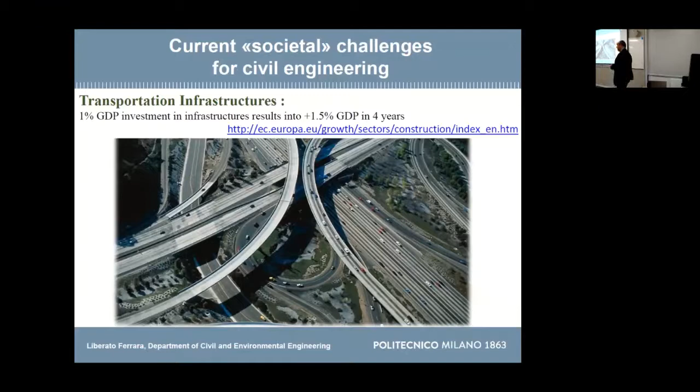And also, our infrastructures worldwide are aging. This is quite natural - we built them 50, 60 years ago. Now they are aging. They are also aging because the volume of traffic, for example, has continuously increased. So we are demanding more and more from our structures.

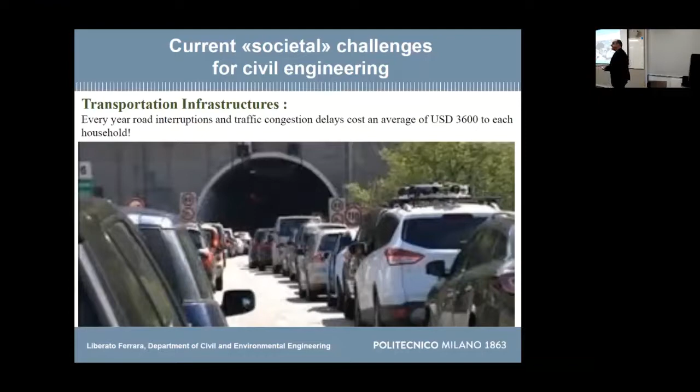And every year, the delays in traffic, the interruptions, cost every household, every family $3,600 - just in money that goes out, and you don't know why.

Coastal protection - we always hear about climate change, which is nowadays a reality. And we have more and more frequent extreme weather events, which actually stress our structures.

Also, we have to take into account that we have to look for coastal defense structures, because just in the European Union, 700,000 people live in areas which are exposed to coastal flood. And we have a huge coastline - 68,000 kilometers. The US has just 1/3 of it.

Green economy, decarbonization - what does it mean? Well, first of all, it means that we have to reduce our dependency on fossil fuels. This is another big problem, because we cannot simply go to the mine shaft, close it, and forget it.

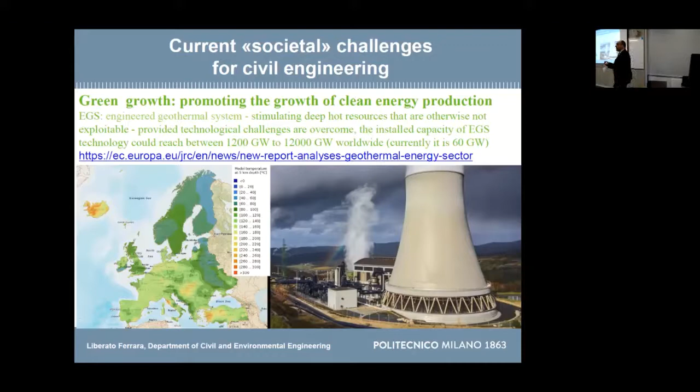There are structures and infrastructure in service of that. You can imagine that the water that you extract from the soil has a huge quantity and different types of aggressive substances in it, and they attack the structure. So this is a problem that civil engineers working with construction materials have to provide a solution to.

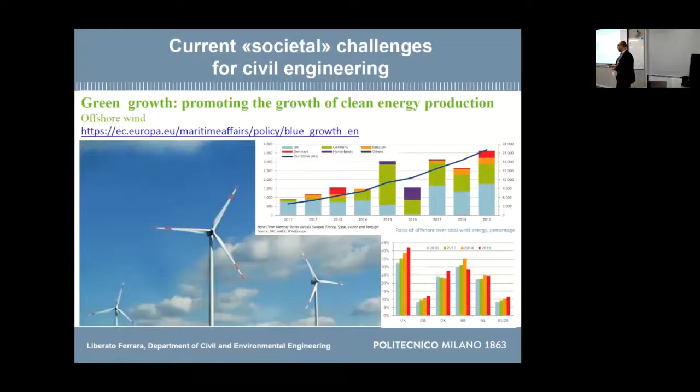We have to provide a solution to make offshore wind energy more competitive. And this is also a huge field in which we can work. And there are also a lot of sectors which are related to what is called blue growth.

Think of it - how do we call our planet? How is it called? Earth. What is it made of? 70% of it is made of water. So it's just like an oddity. But the fact is that only 5% of our economy comes from the sea. For example, 5% of our food, and 95% comes from the earth. So there is a disproportion.

So we have to invest more and more into sectors which can promote a sustainable, respectful use of the sea resources. And some of them may also be interesting for us.

There is a very interesting exhibit inside which stresses that humankind has become a geological force in the sense that we shape the planet. So we have this responsibility, we have to shape it in the right way, not to destroy it. And as engineers working with concrete, we have the responsibility of using appropriately a material which is the second largest material used in the world.

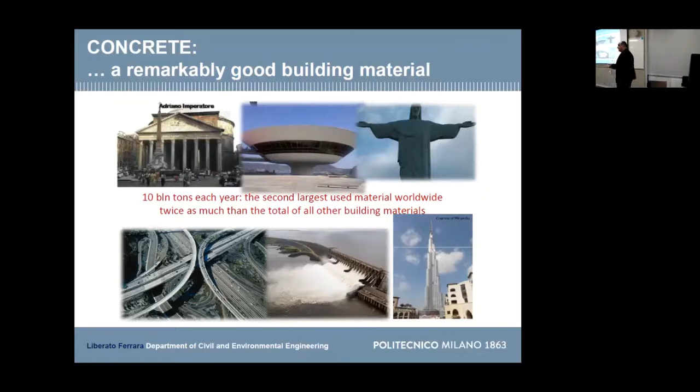Water is first, so concrete is the first man-made material that we use. Every year we produce about 10 billion tons of concrete, meaning each one of us has a dowry of 1.5 tons of concrete per year. And we make structures, infrastructures, iconic buildings like this one.

This is the oldest concrete building still surviving in the world, the Pantheon in Rome, made with a functionally graded concrete. We think this concept is relatively new, but the Romans adopted it: they made concrete with travertine aggregates, very strong and hard in the basement, and reduced the strength of the aggregates as they went up. The dome is built with pumice aggregates.

Pumice is a stone which floats, used just to reduce the weight. You can see how the thickness of the dome also reduces. So there was some ingenious structural design in that.

The other thing is, look here, the dome starts here, whereas the wall goes up to here. If you're familiar with shell structural analysis, this is the point where the hoop forces move from positive tensile into negative compressive. Where the hoop forces are tensile and concrete cannot resist them, the Romans put the confining wall. Where the hoop forces were compressive, which concrete can resist, they left the dome free. This is a concept that, for example, Brunelleschi and Michelangelo had completely lost when they built their domes, which actually suffered cracking exactly in this area.

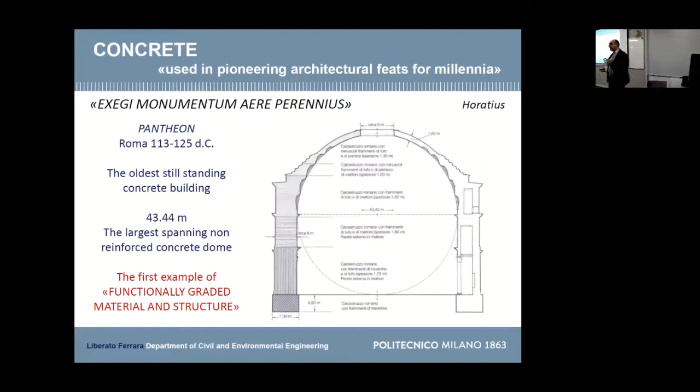So this is just to tell you that as engineers we have to merge material and structural concepts. I like to say that we must learn to think holistically. This is our responsibility, and we also have to think beyond the cubic meter concept.

So why does concrete have such bad publicity, people saying it's not environmentally friendly? I'm quoting our colleague and friend Karen Scrivener from EPFL Lausanne, who said it's simply because we use such a large quantity of concrete. If we had to make the same things with any other material, the carbon footprint would be much more disruptive than what we have. So we have to keep this in mind.

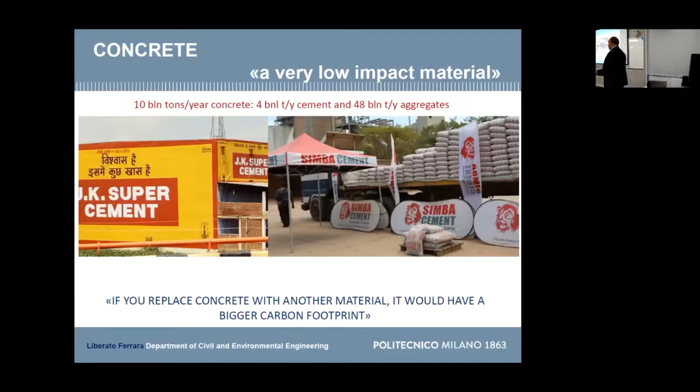And keep in mind that cement is a commodity nowadays. These are pictures - this is India, Niranjana and Priya can confirm. This is Tanzania - you can find it really on the streets, like in an open air market. It's a commodity.

But cement and concrete suffer from a problem: like stones, they do not have good tensile strength, so we need reinforcement. And for several reasons, the marriage between concrete and steel is an excellent marriage. We have to consider that steel is the weak part of it, because steel, when exposed to the environment, is subjected to corrosion.

Concrete protects it, but concrete cracks, and so immediately a highway is open for the aggressive environment to get in. Each year, the cost of repairing corrosion damage sums up to 3.4% of the world's gross domestic product. So you can imagine that part of our work is just to repair these damages.

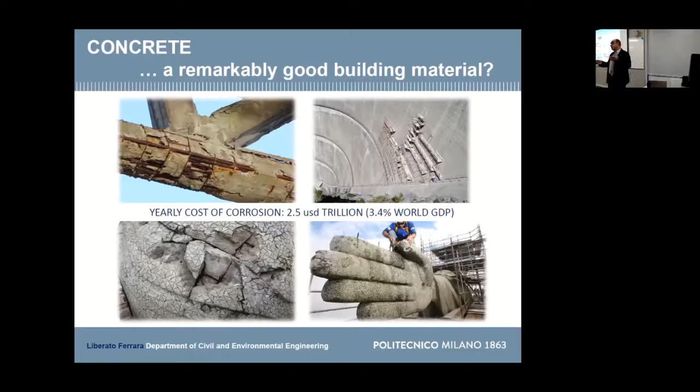Concrete cracks, as we've said. And if you pick up any structural design code throughout the world, wherever you go, you find sentences like this: cracking is normal in reinforced concrete structures. Concrete cracks, you cannot avoid it. And when I teach beam bending to my students, one of the first concepts I try to deliver is that we want concrete to crack.

Because if concrete does not crack, steel works at 20, 30 megapascal, which is less than 10% of its yielding capacity. So what is the matter of putting there a material which works at 10% of its capacity? It's not wise from the engineering point of view.

But you also find a sentence like this in the code: cracking shall be limited to an extent which will not impair the proper functioning of the structure and the durability, causing its appearance to be unacceptable.

This brings me to another concept. When we design generally a concrete structure, our approach is this: we design for ultimate limit state and we check the serviceability. This is perfect, this is okay. Well, if you go for ultra high performance structures, more likely it's not so obvious that once you have designed it for ultimate limit state, serviceability is okay.

But just remember that ultimate limit state is something that we design such that it never happens. Serviceability is something that the structure will experience throughout its life. So we have, in a sense, also from the educational perspective, to bring back importance to what is the service scenario of the structure, because that is what the structure will experience throughout its life. And one of the main parameters that we are called to determine is the crack width.

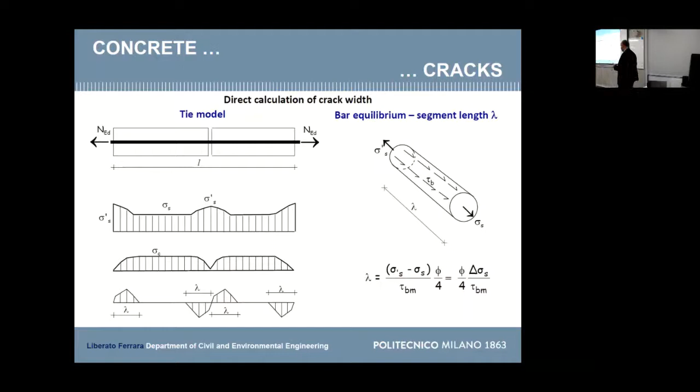And by simple equilibrium consideration, if you go back to any of your structural mechanics, structural design handbooks, you can find this equation. You find here that this transfer length is related to the bar diameter. Okay, keep in mind this concept.

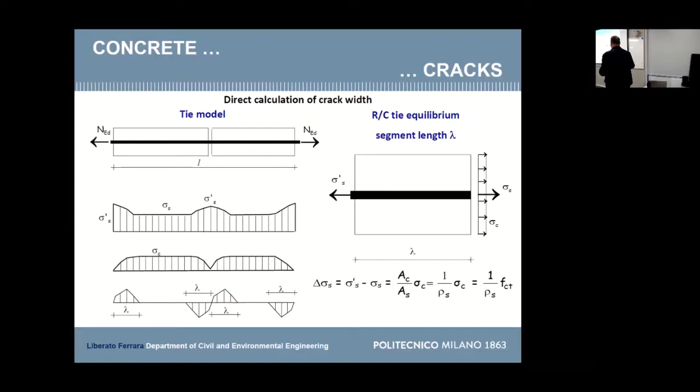Then if you write some other equilibrium and you consider not only the bar, but the whole segment, here is a crack. And here you have the coupled action, concrete plus steel. You find what is the increment of stress, the stress transfer, which must go from steel to concrete and vice versa. So you combine these equations and we find that the transfer length is proportional to the bar diameter and is inversely proportional to the amount of reinforcement.

So the issue is that with reinforcement, you do not avoid cracking. You need pre-stressing to avoid cracking. It's not that you put more reinforcement and you avoid cracking. No, that is a very bad idea to propose.

But given a certain amount of reinforcement that you must put there for other requirements, there is this parameter that you have to take into account, which is the diameter of the bar. The smaller the bar, which means also the higher number of bars that you have to put in there to get the same area, the smaller is this transfer length.

This transfer length, anyway, is also related to the crack width. So we calculate total crack width as the unit crack width, the difference in strain between steel and concrete. You can work out these equations from any handbook, and you multiply by this length parameter.

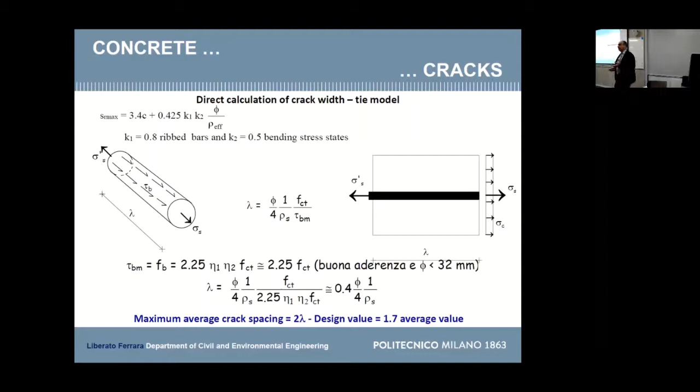So this means that if you have smaller bar diameters, you will have more cracks, but each one of them will be smaller. And this is good from the structural point of view, because the crack width is the parameter which governs the durability, but it also governs the loss of stiffness, which impairs the serviceability, for example, the deflection of the structure.

So this is what we generally do for cracks, which are caused by mechanical actions, can be forces, can be restrained deformations that induce stress. But there are a number of phenomena that can cause concrete to crack that we do not know how to handle, how to calculate the width of crack due to this. And most of these phenomena really occur in very early ages of concrete.

For example, plastic shrinkage is due to some differential evaporation. You have a gradient of water. And just some examples of an experiment we did with a homemade setup that we built. It cost us 50 euros going to buy the pieces in the stores.

So this was the specimen, this was a heater, this was a fan, and we had here a pot with water on a scale just to check the water evaporation rate, which is the parameter set by the standard.

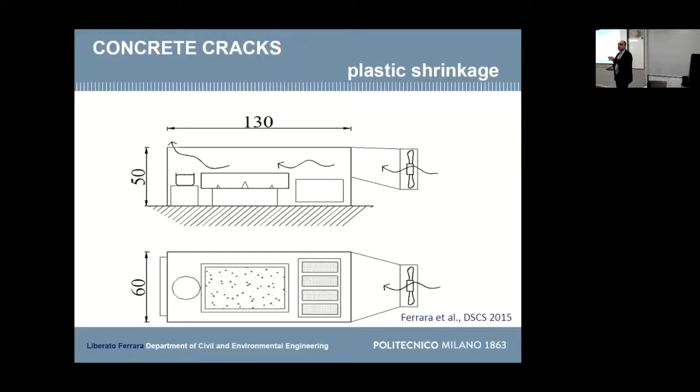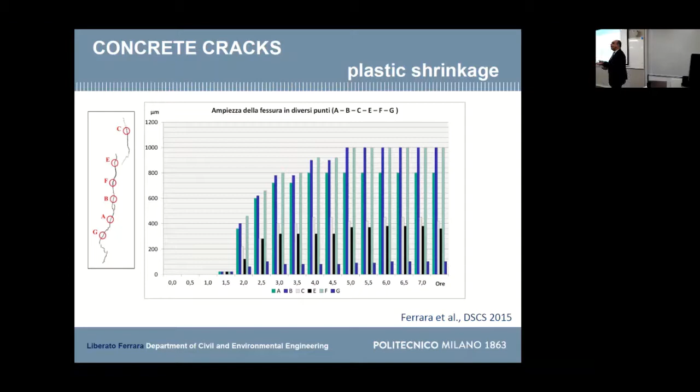This is one of the cases in which self-healing technology may help, because these cracks immediately appear and you can hardly cope with them well, you can check the curing status and so on. But if you have something which helps close them, in this case we used pre-soaked lightweight aggregates, which helped in some kind of self-curing, supplying water. We were able to cope with that.

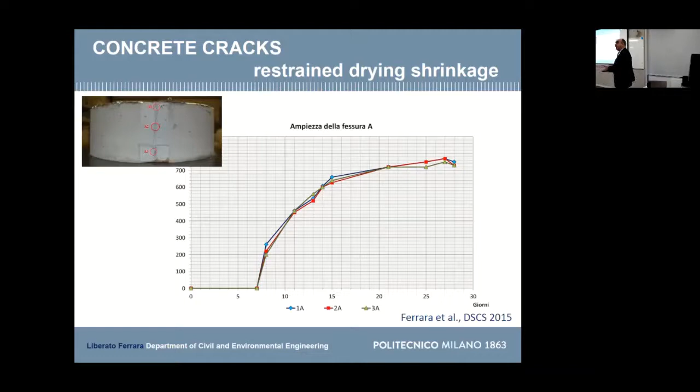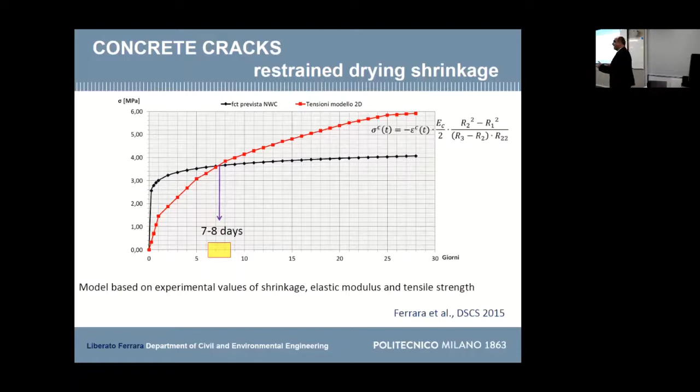You also have models to predict the appearance of the crack, because you can build up your strength development curve and calculate, with the linear elasticity formula, the stresses in the ring from the strain gauges that you put in place. When the curves meet, you find the cracking moment.

So what is the idea behind the ultra-high performance concrete process? We have seen that concrete cracks and the crack width is proportional to the bar diameter. But if you think of a bar, the smallest commercial diameter cannot go below a certain threshold, because it still has to comply with ductility requirements. If you look for ductile steel, the smallest available diameter on the market is about 8 millimeters. So what shall we do if we want a lower reinforcement bar diameter?

Just go into fibers. Fibers can have millimeter wire diameter. Except for special mixes and special cases, they do not increase the tensile strength of concrete. It's not that—but they increase the capacity of the concrete to resist crack propagation. So they control the opening of the crack.

All of us working with self-healing technology know this is important for durability, and we also know that a narrower crack has a narrower volume, so it's easier to fill and to repair. We now have, in the codes and standards, the tools to identify the properties of fiber reinforced concrete.

This is a 3-point bending test on a notched prism. You make the test, record the results, and plot them in terms of nominal stress. Keep in mind this is not a true stress—first because the test is a bending test, not a tensile test, and also because we calculate the stress from the load. We never measure a stress, we measure a load.

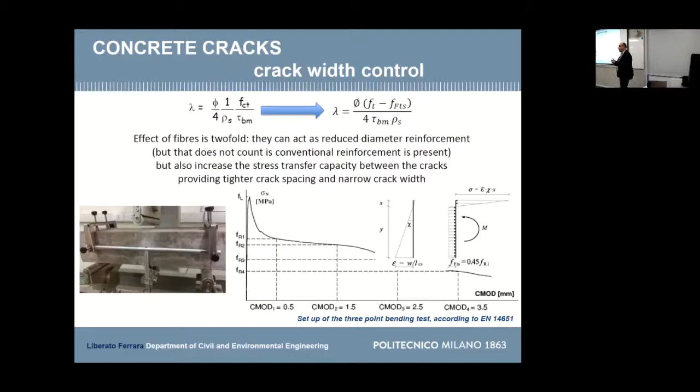So the code is made in such a way that fiber reinforced concrete is homogenized, made compliant with ordinary reinforced concrete, because one of the issues could be that you use both fibers and conventional reinforcement together. So you need a method to match them and make a consistent design.

So if we pick the spacing of the crack as a parameter, where is the effect of the fibers? In the codes, you find the effect of the fibers here: this is the tensile strength of concrete, and this is the residual post-cracking strength that fiber reinforced concrete can guarantee. The fact that concrete can take some stress even after cracking reduces the crack spacing, which is further beneficial to the crack width.

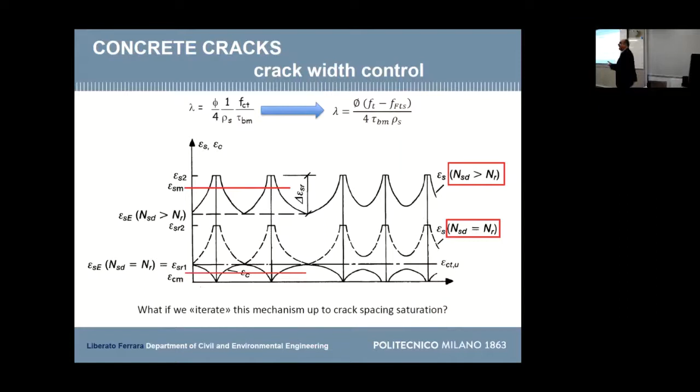So if you iterate this process up to crack spacing saturation, you do not have any more space to form a crack. This is the concept of ultra high performance concrete—you form the first crack at this point.

If you would have ordinary concrete after this point, your stress would immediately soften. But with high performance concrete, you have fibers inside. So what do the fibers do? They pick up the stress from a crack and redistribute it to the neighboring cross sections, and you can form another crack, and another crack.

As long as you can form cracks up to crack spacing saturation, you follow this strain hardening, which can be more or less steep depending on your mix design. You have this multiple cracking and strain hardening capacity. Obviously, this depends on binder content, water-binder ratio, use of superplasticizer, maximum aggregate size, fiber dosage, fiber orientation, and several other parameters. But this is the basic concept.

So how do we identify this? These are results taken from one of the research projects in which I was involved as coordinator, the ReSHEALience project, which some of you also worked on part of. Well, these ultra high performance materials - if you come up with the cost per cubic meter, you'd jump on your chair because it's 4 or 5 times that of ordinary concrete. But they are thought to be used in very thin elements.

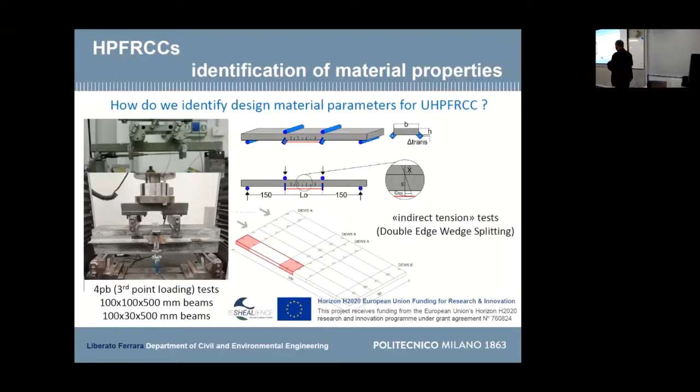So we cast very thin beams. We performed 4-point bending tests in this case because we wanted a zone in which we could have multiple distributed cracking. We also developed a test methodology, an indirect tensile test methodology called the double edge wedge splitting. You have these square tiles, we cut grooves and notches, and then we apply a compression force through some devices. The principle is the same as the Brazilian splitting test.

What do these grooves do? Well, they deviate the compression forces far from the ligament, which we checked with finite element analysis. We have on the ligament a pure tensile stress state.

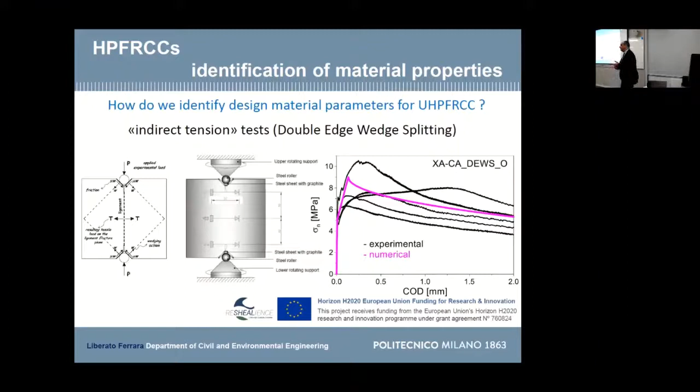These are experimental results from this test. The purple curve is the one that, through back analysis and back identification based on force and moment equilibrium equations, we identified from the bending test. So there is some consistency between the results.

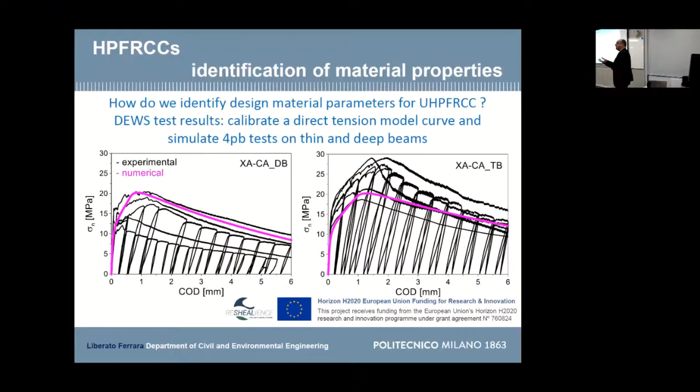And this is the simulation. It's interesting to see that, for example, these were tests made on 100 millimeter deep beams, and our prediction was on the upper bound. These were tests made on 30 millimeter thin beams, and our prediction is on the lower bound, because in 30 millimeter thin beams with 20 millimeter fibers, all the fibers are aligned in the right direction, so you have an improvement of the performance. In 100 millimeter beams, the orientation and alignment of the fibers is more random.

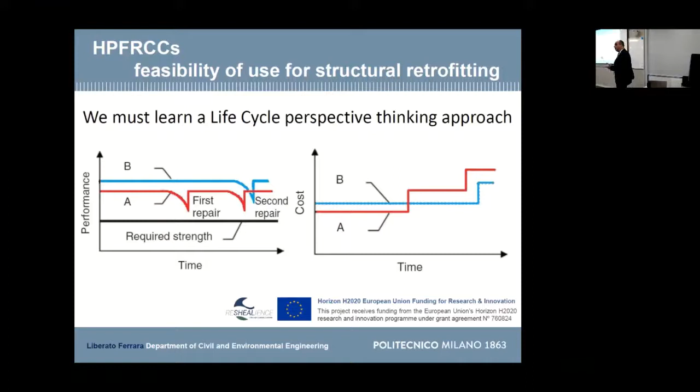So what you have to ask is, what can I build with 1 cubic meter of material? Think in a life cycle perspective - what we've discussed throughout these days is, surely I can have a higher initial cost of my structure, but my structure will be more durable. So I have to intervene with the first maintenance not in a few years, but later in time, and this will bring me a recovery of the cost. So other concepts, other information, other actors come into play in order to evaluate this.

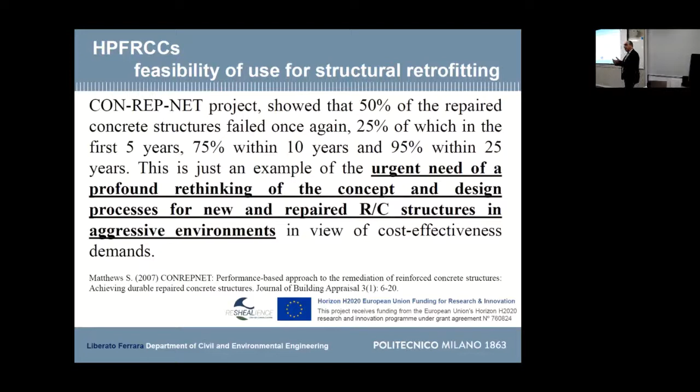Another thing - when we use these materials for retrofitting, we have to think of the durability of the retrofitting. This is a survey that, about 10 years ago, the European Commission promoted, and 50% of repaired concrete structures were shown to fail once again, and 25% of them within 5 years after the first repair. So you can imagine that from an investment point of view, this is continuous drainage of money, because every 5 years you are forced to put that money, resources, and materials back into it.

The first project I was involved in using these materials for retrofitting was dealing with earthquake engineering - shear walls. Most of all, we have shear walls in buildings because they are the system we use to resist lateral loadings, but we must also have openings in shear walls. They can hardly be monolithic, because we must have windows or doors and so on.

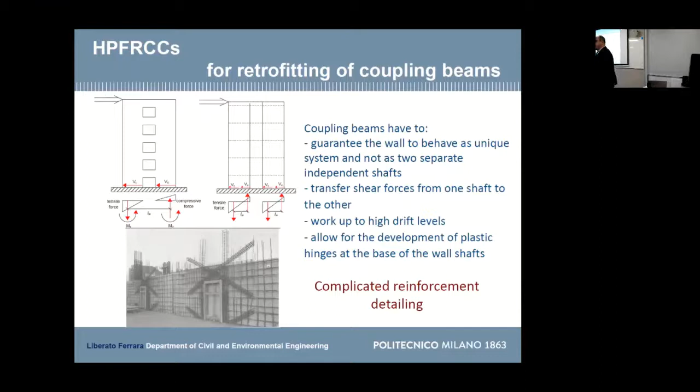This is surely something you can do for new constructions, designing them this way. But pick up any building built everywhere in the world between the 50s and the 70s. Why do I say this? Not because they built badly, absolutely not, but because at that time, in most countries, even strongly seismic ones, there were no seismic codes enforced. Only few areas were labeled as earthquake regions, based on historical records, and those records were mostly the baptism registries of churches. So they realized what was happening. This is quite interesting.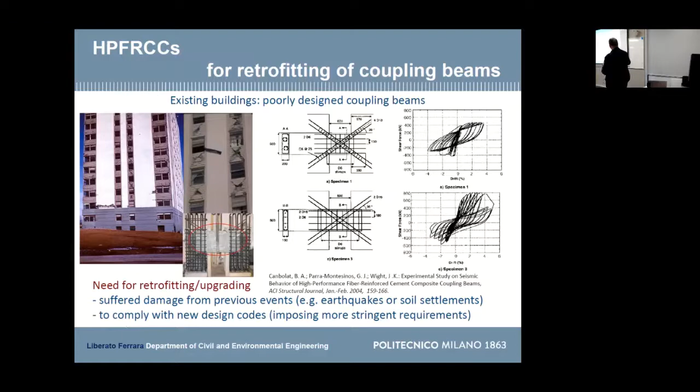Those in the picture in Alaska, where a project was made. You see, using these materials, you go from this kind of detailing, which is very demanding, to a less complicated detail. You use less reinforcement and get the same capacity, or even better, because here we are at about 450 kilonewton, and you go higher, and the cyclic capacity is okay as well.

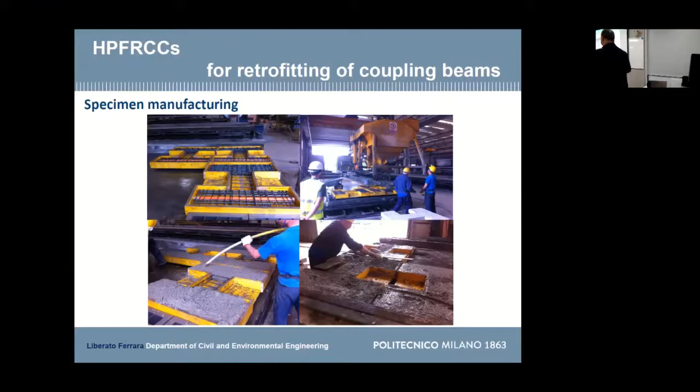If you have to upgrade a structure to retrofit it, you have different technologies, so we wanted to use this high performance material. This was the detail of the setup. You see, these are our specimens. The coupling beam is this part here, and this was a coupling beam which replicated a structure in which no seismic design consideration was taken into account—just minimum reinforcement for non-earthquake regions. These other parts simulate the shear wall, so they were over-designed, over-reinforced.

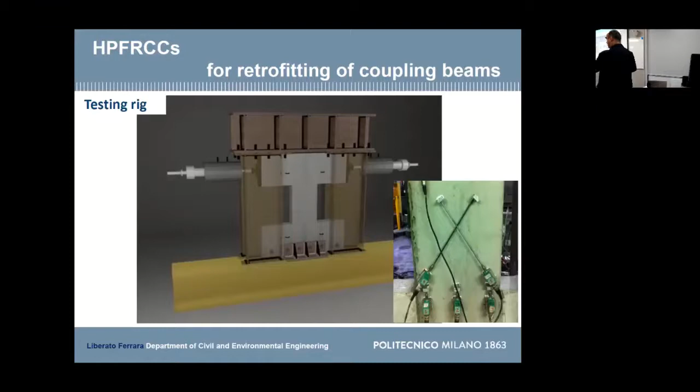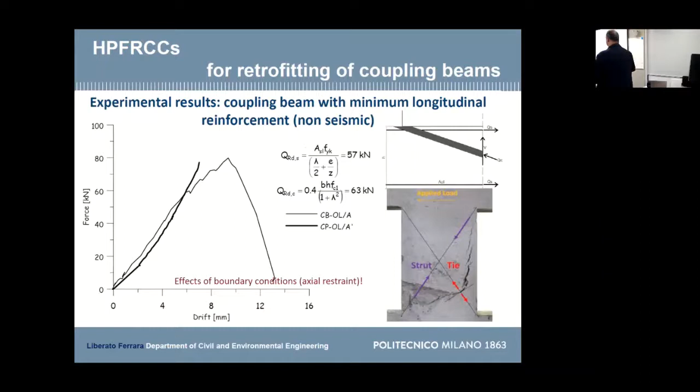This was our setup. You have to imagine the specimen was tilted up at 90 degrees in order to make the tests, and this was how it was functioning, because we wanted to apply cyclic loadings. We tested a beam without any reinforcement, and got a shear diagonal crack—theory is perfectly respected. Then we put longitudinal reinforcement with a strut and tie mechanism, and then we put our material. This was the envelope, the monotonic curve, and these were the cyclic tests that were performed. This was the failure mode—a typical failure mode of a compression strut, which fails.

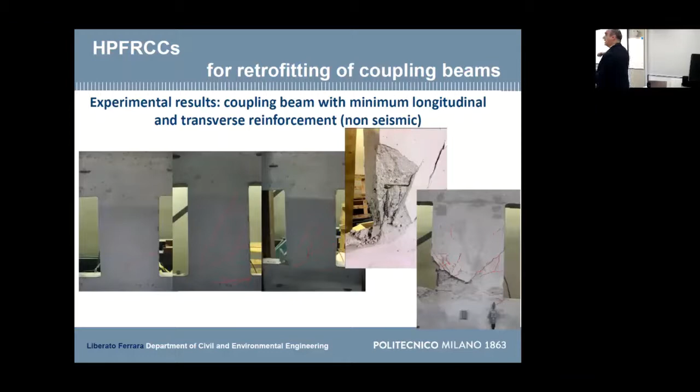So we went into retrofitting. The material was more or less the same, but we used fewer fibers than we would in a new structure, because the requirements were different. It's not exactly mandatory that you use a huge quantity of fibers—use them for the requirements that you need. The material was very fluid. This was a master student working at that time on this project, and these are the results.

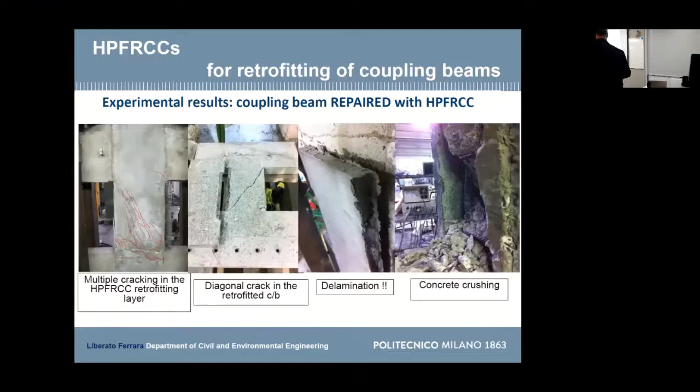So we pre-damaged the structures, then applied the repair, and you see, compared to 60 kN, we went up to 200 kN with the repairing. You can see this crack here, which was formed in the substrate, and it resulted in several multiple cracks on the retrofitted specimen. So we were able to spread this localized damage into several multiple cracks, and this was the advantage of using this material for enhanced structural capacity. Compare the control specimen, non-retrofitted, with the retrofitted ones using different technologies and different amounts of pre-damage.

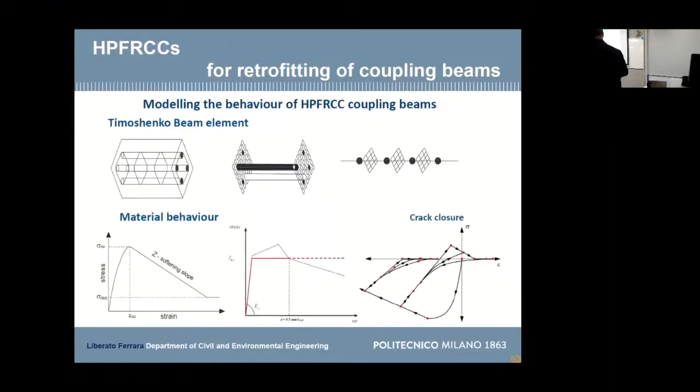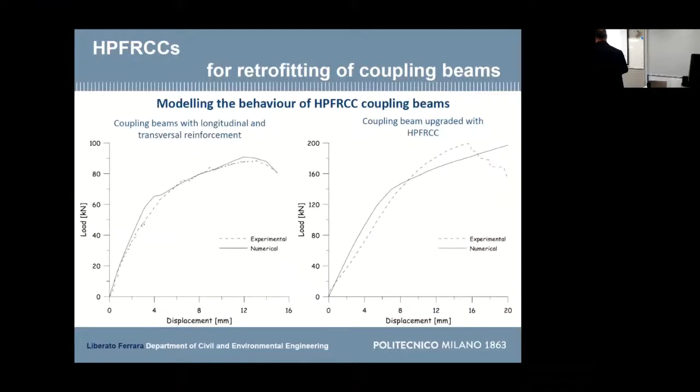So then we went into modeling. I won't spend too much detail on that because it was a conventional finite element model. We simulated the test and got good agreement for the monotonic and cyclic tests. What we wanted to see next, we had to scale up. We started from the material, went to a mesostructure I would say, and now we scaled up to the structure. This is the process that any engineer has to do when designing.

And we said, okay, imagine that we have a medium-rise building. Is it necessary that we retrofit all the coupling beams at all the stories? Or can we just intervene where it's mostly required?

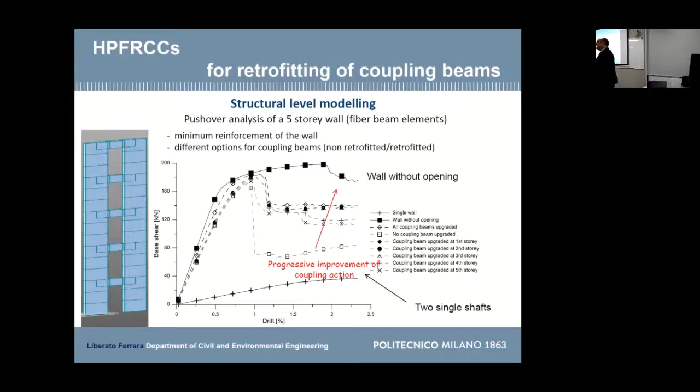Now the thing comes, okay, what we did, when you go to build up a finite element structural model, you are quite sure of what you have done. You don't use a finite element model to design, you use it for check, because this requires time. So you will never do it again and again and again. So you need some tools to make the design calculations on the back of an envelope. Also because in that case, you have your own numbers to check with that of a computer.

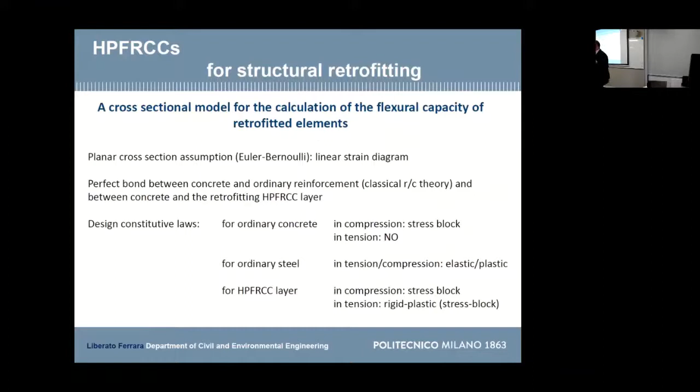So the methodology is very simple. This is something more or less everybody of you is familiar with. The design of a reinforced concrete cross-section. You have a compressive stress block for compressed concrete, and you have the tensile force in the steel. Very simple. If you add a layer of ultra high performance concrete material, you simply add a stress block on the tension side for this material. And the equations are exactly the same.

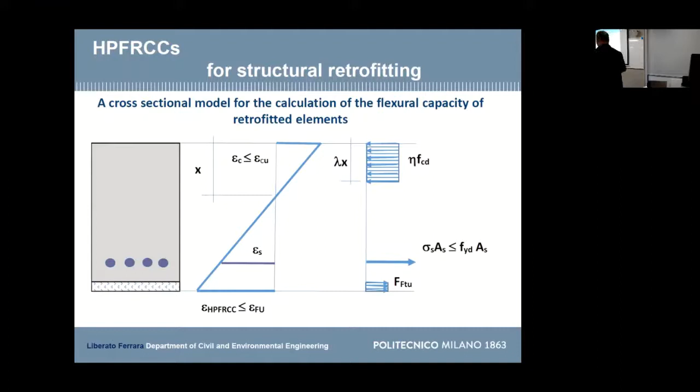You write the force equilibrium equation through which you calculate the position of the neutral axis, and then you write the moment equilibrium equation through which you calculate the capacity of your beam. These are the equations. Force equilibrium, compressed concrete, steel, tensile UHPC, you find the neutral axis position, and then you go for moment equilibrium about the centroid of the compressed stress block. You have the contribution of ordinary steel, and you have the contribution of UHPC.

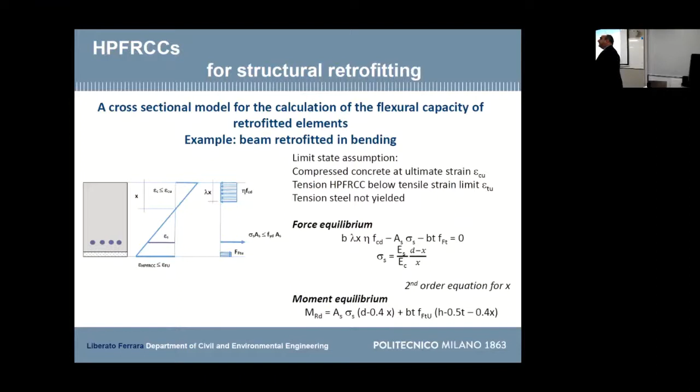That's very simple. Then you can specialize this to different cases. What if the steel is not yielded? You know, this is conventional reinforced concrete design here. But just have in mind that this is very simple. You have another term. Concrete can take tensile stresses. This is the conceptual difference. Then you have the model, equilibrium follows.

As the Latin says, rem tene verba sequentur. Hold the things, the words will come later. So all the physical concepts, if you have them, we are engineers, we can write down through mechanics a force and a moment equilibrium equation, and they will follow. One important thing is this.

This is a paper which was published about 10 years ago, in which they used this material for jacketing. So it was meant for shear and bending retrofit. And then they made some calculations, some design, and they realized that, okay, well, if we predict our ordinary reinforced concrete, our models are very good. But if we predict our model with retrofitting, what does it happen? The prediction is much better than the experiments. So this means that our model is not on the safe side.

Well, because what did it happen? The material parameters were identified through a direct tensile test. You see here, there was quite a remarkable strain capacity deformation, up to 0.5%. But what happened in the reality? In the reality, the non-retrofitted beam, you see, had this very, very distributed cracking pattern. When they went into the retrofitting, there was just one single crack.

In this case, the bond was so good that the crack formed, but the redistribution length was so narrow that they were not able to redistribute and take advantage of all the deformation capacity of the material. So they played with the parameters and they realized that this was the problem. So in that case, it's also a balance of guaranteeing a good bond, but the bond must be such that you are able to redistribute the crack, the damage from the substrate to the retrofitting thickness.

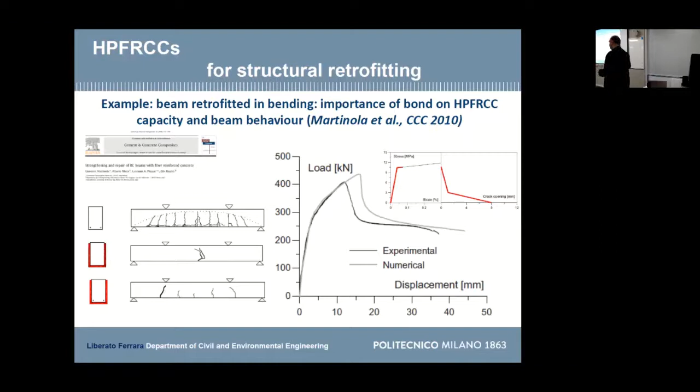Then I put here as an exercise for you the case in which we are going to retrofit a column. This is an interesting application because it can be done with very limited invasiveness.

You really make a narrow hole on the slab or top floor and you pour the material from the top, or if you have an adequate pumping equipment, it's a little bit more difficult because with a lot of fibers, your pumping hose may be damaged by the steel of the fibers. But it has been done, for example, in a number of public buildings and schools with very limited invasiveness.

You have just 2-3 centimeters thickness, which also means that if you go in earthquake retrofitting, you do not alter the stiffness of the building and you do not decrease the space. If you have to go for conventional concrete jacketing, the minimum is 5-6 centimeters that you add on both sides. So you lose 10-12 centimeters on the 4 sides, you lose space around, and your stiffness may be altered. And when it comes with stiffness for earthquake design, it's very, very problematic.

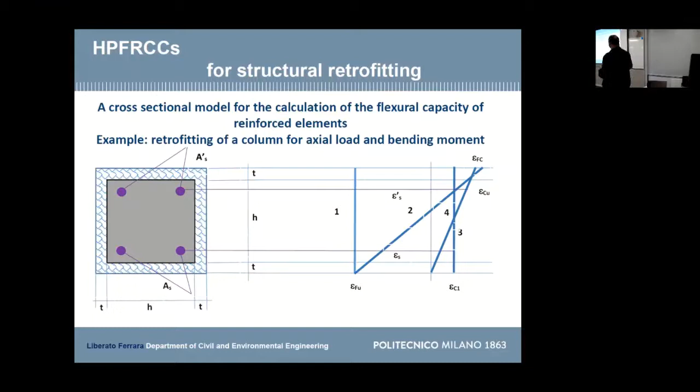So for a column, you can have different ultimate limit state conditions. The cross-section is purely under tension. You have the strain in the tensile UHPC going at its limit. You have the strain in the compressed concrete going at its limit, or you have the purely compressed cross-section. And for each one of these cases, you have a different distribution of strains, distribution of stresses over the cross-section, for which you write force and moment equilibrium. So you can build up, if you go back to your design of reinforced concrete, you build up the moment axial force failure envelope. You use it just to make your final design.

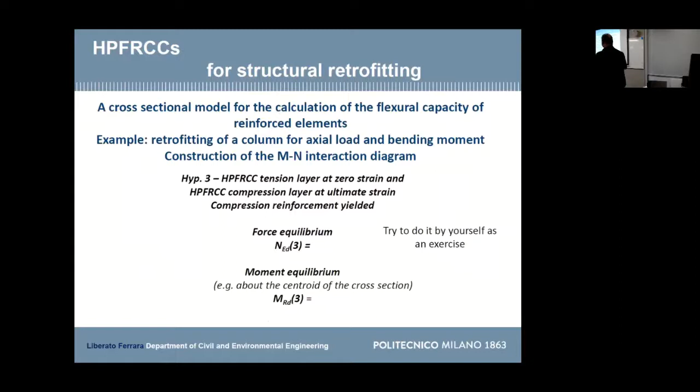I reported here, for the sake of completeness, all the cases that you may have, and you will have them in your slides, which will surely be made available. The equations may look complicated, but after you have written them, you write your own worksheet, and it's good that you write it yourself because you know what the worksheet will do. You will not use it blind, and you can use it for your purpose. If you want to do some homework, there is also a homework assignment for you to practice this.

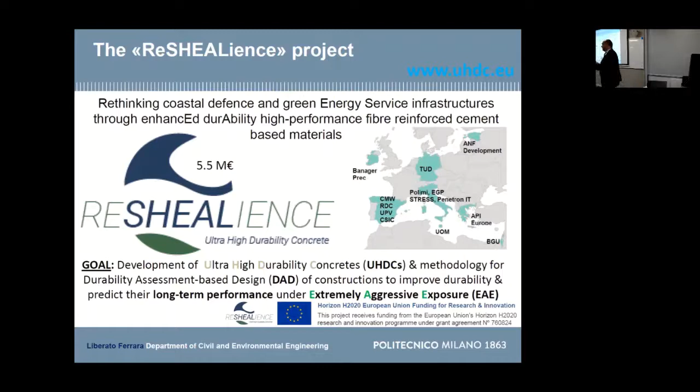So just going a little bit into the project I was talking about before. In this project, we developed what we call ultra durability concrete materials. It's just the concept of material, not a specific design. What we wanted to show is that you can make these ultra high performance, ultra durability materials with locally available constituents tailored to the intended requirements that you need. 14 partners throughout Europe, crossing the whole value chain of the concrete construction industry. Some of them are also partners of SMARTINCS as well.

And we have built and are currently monitoring 6 structures in Europe. 2 of them are in Spain. Some of you have already seen the mussel raft or the offshore wind floater in Sagunto port. 2 of them are in Italy, in a geothermal power plant. Surely David and Niranjan came to visit it. One is in Ireland, a pontoon in a harbor. And dealing with retrofitting, we did an interesting case study in Malta, in the Valletta harbor.

It was a water tower built by the British between the two wars, so something like the early 30s. It's about 80 years old. And the concrete was excellent, because we took the core. The project was led by my colleague, Professor Ruben Borg, and I'm going to show here some of the slides that he has given me for this purpose, and he has agreed to let his slides be shown.

You see here the tower was severely damaged by exposure to airborne salts, airborne chlorides. We thought at the beginning, when I looked at the picture, that this was the face exposed to the sea where the winds come from. Actually, it was the opposite side. So it was a combined effect of the wind suction - when wind comes, you have pressure and suction on the other side. So this was the part where the suction, the main direction of the wind, caused erosion and the effect of the chloride. So it was a combined effect.

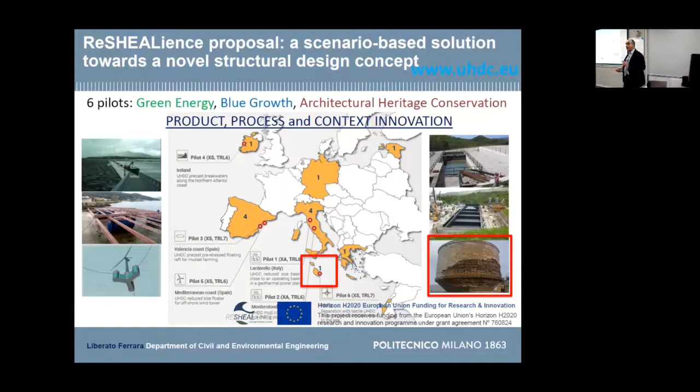But we took a core on the other side, which was perfectly intact. And after 80 years, the concrete was 40 megapascal strength - the real strength of the structure, of the concrete in the structure. So obviously, when you go for retrofitting, you have to make a survey. You see, this was the status of the inner part of the tower.

So the grass was growing because it was completely abandoned. So we made a survey also with drones.

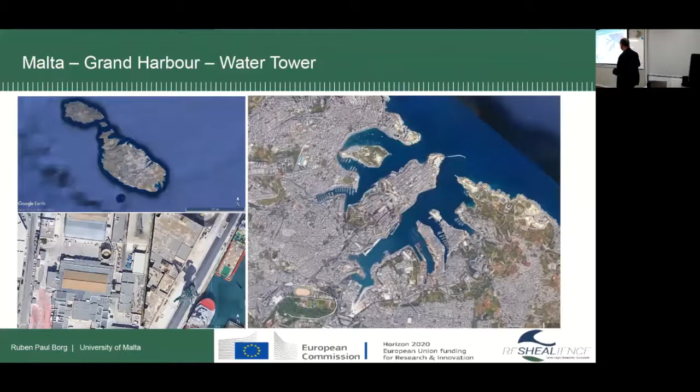These are some pictures. These slides are by Ruben. This is the area, these are the Maltese Islands. This is Valletta, and the harbor area is here where the tower is. Here is the breakwater that we saw in the previous picture.

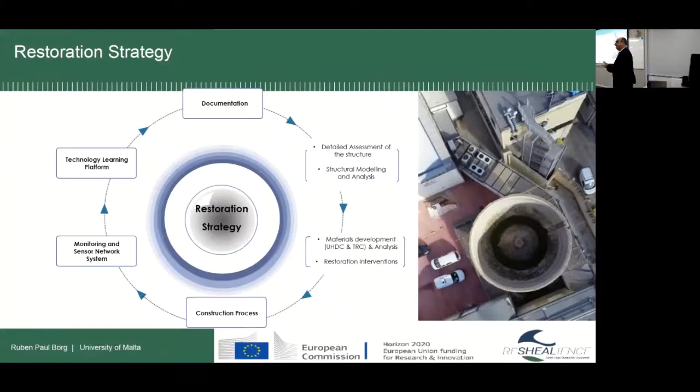This is the strategy that you have to follow. You acquire documentation, make an assessment, a modeling, select the material, go to the construction process. In the ReSHEALience project, we implemented also a monitoring system and created a technology and e-learning platform, which will stay after the completion of the project, so the results will be made available.

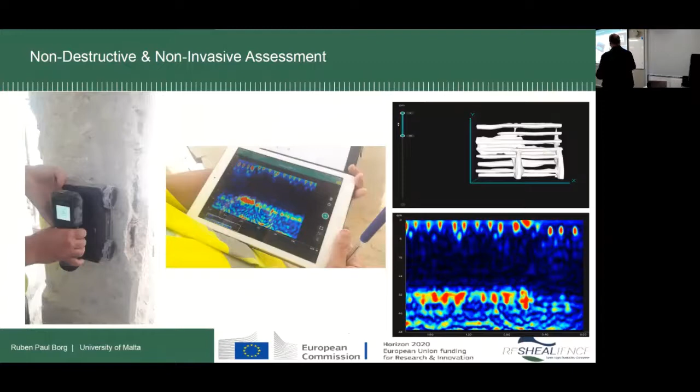So you go for historical documents, very nice blueprints that you cover. We went for drones, constructed 3D image models. A survey was made to identify the position of the reinforcement with conventional tools, and reconstruction also through 3D images, some thermal imaging to see where the damage was, to identify delamination and spalled concrete. Then a structural monitoring, a structural assessment was made, identifying the natural frequencies.

So you see, it's quite a flexible structure because the frequency is about 3 Hz. 3 Hz, just to tell one thing, is the frequency for which now the wind towers are designed, because the blades, in 1 second, the 3 blades make one complete turn. So this is 3 Hz. Just to give numbers to which we may become familiar with in our design processes.

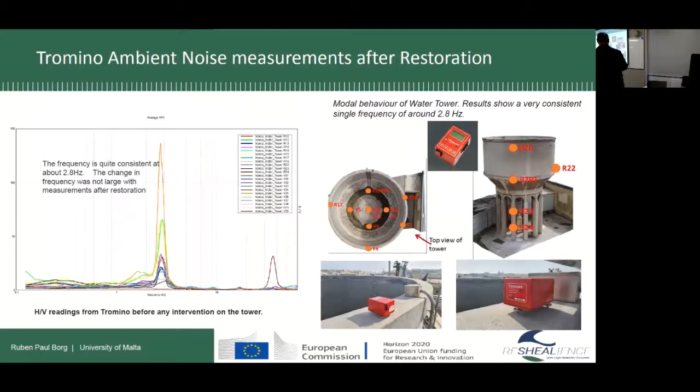And we started in 2019 to think of it, and we arrived, after 2 years, to have the structure back into full serviceability. Obviously, a different kind of expertise were made because there were some lichens, some shells which were found into them. So there was some biological life into the basin of the structure.

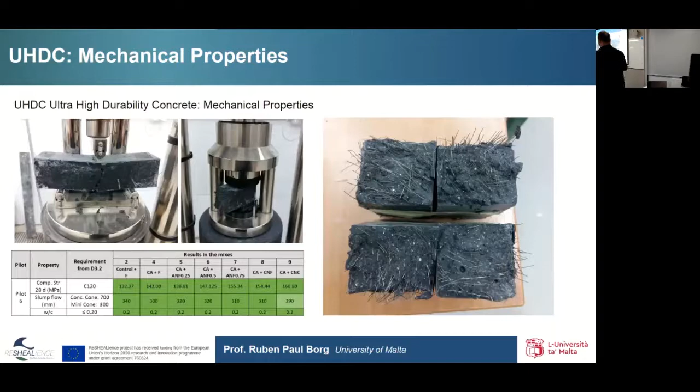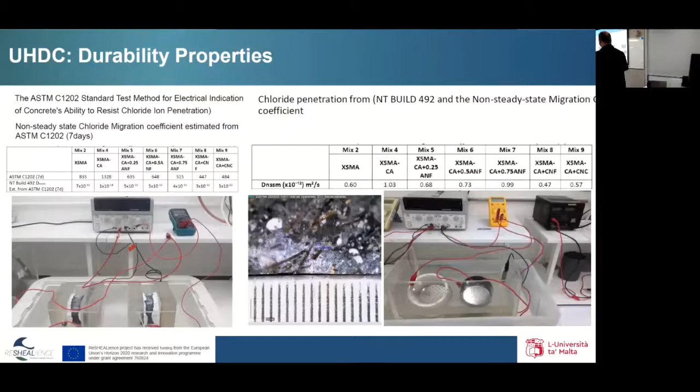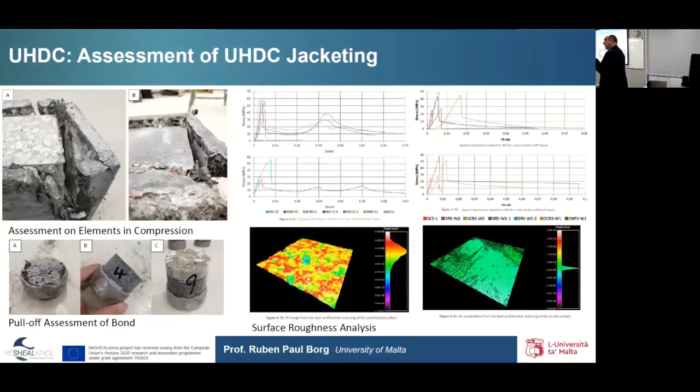The important thing is that we had to retrofit the columns of the tower. So first of all, in Malta, they built a replica, small columns that they jacketed with this material to check the different requirements on the bond between the substrate, the stiffness of the material. These are tests similar to ones that Daniel has shown. So they are tearing off tests just to check the bond level.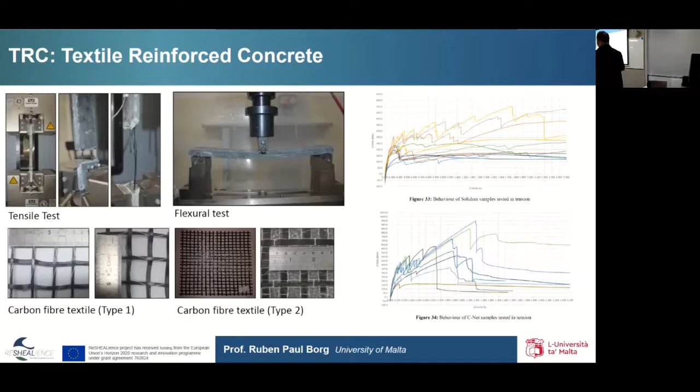Then to retrofit the drum, a different technology was used because it was too difficult to build a scaffolding in which the fluid material could be poured. So we used a textile reinforced concrete, which was highly thixotropic, so we could apply it without formwork by hand, and there was a carbon textile reinforcement for corrosion resistant requirements. Then once the material was selected, the retrofitting was designed with a structural analysis.

You have to identify the stresses that you expect and that material has to withstand. So we went up to this.

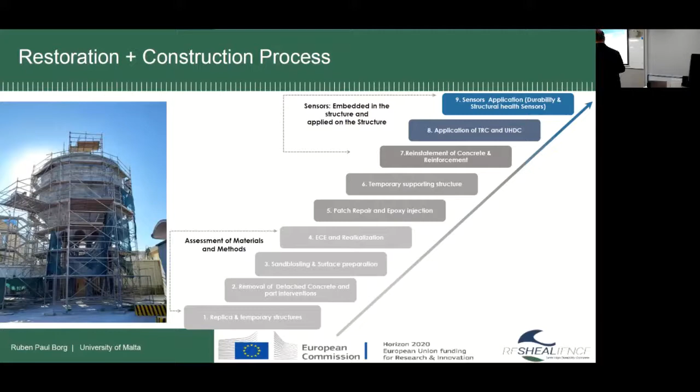So the lab work then started the site work, removal of all the parts, preparing the surface. In the case of reinforcement, there was replacement of the damaged one, but also realkalinization of the surrounding concrete. It was damaged by carbonation and chloride corrosion, patch repair, build the temporary supporting structure, and go up to the completion of the work.

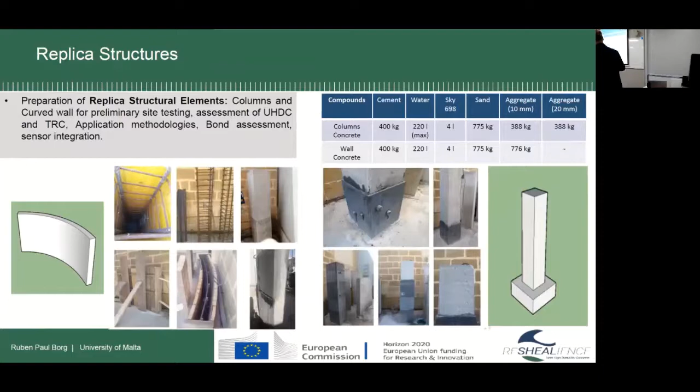So you see, these are the replica structures of the curved wall and of the columns, which were built and tested in the lab, different tests which were done. These were some images, removal of the cover.

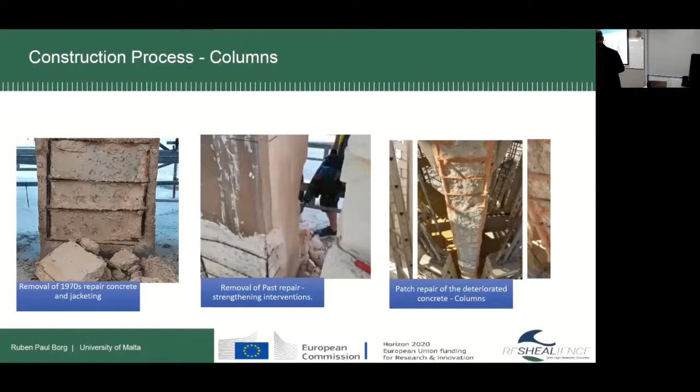The tower was already retrofitted in the 70s, so there was already a 7 centimeters jacketing above, which had to be removed. There was the removal of the past intervention and the treatment of the existing material. You see application of corrosion inhibitor and mortar repair, and this was done, patch repair of elements which were needed, different images of the site, and epoxy injection and sealing of cracks, different operations.

One important thing, you can see this picture. What is strange about the light here?

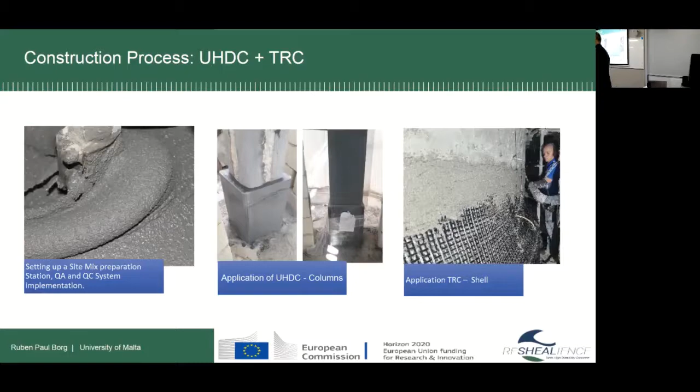All this work was done during night because the construction work went on during summer in Malta, and in the daylight you have 40, 45 degrees, so it's really hard to work with this material at such temperature. I have some other pictures, here it is.

Actually, the work was done in the night shift. So this is something that you have to take into account when you plan your construction site, if you have to comply with some time requirements and so on, because only in the night the temperature dropped below 30 degrees.

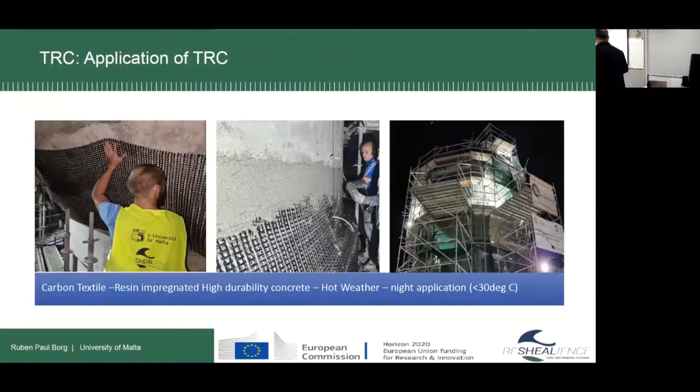And these are some images of the tower as completed, you can see here.

A lot of sensors were installed for corrosion monitoring, strain, temperature, accelerometer, crack monitoring, and also a weather station with all the tools to monitor the weather condition.

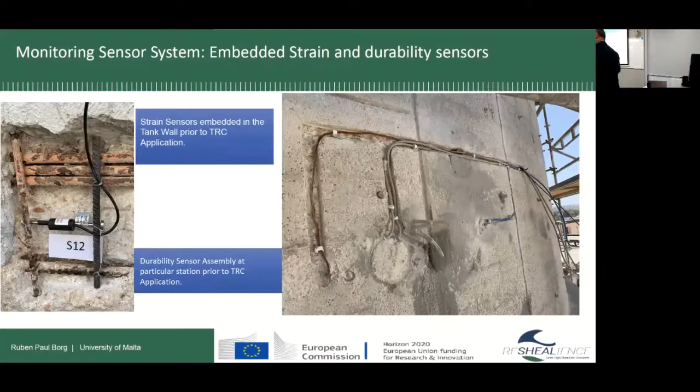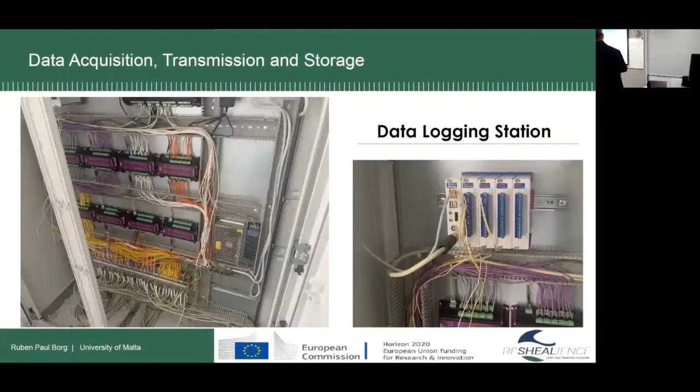These are some images of the sensors. Also the cabling — they counted 15 kilometers of cables all around the tower just to monitor it, with some boxes to protect and hold them and bring them to the station, and there is just a hut, a cabin there where all this comes together.

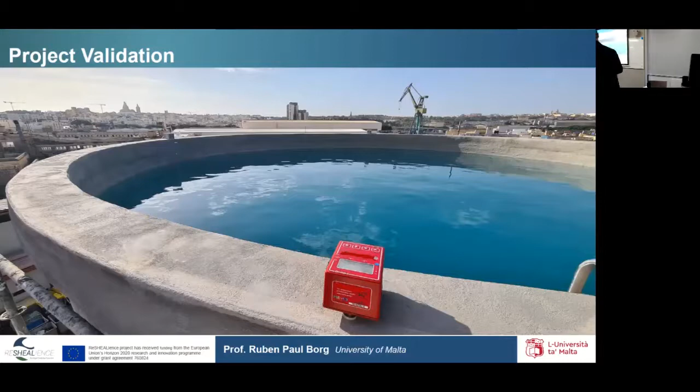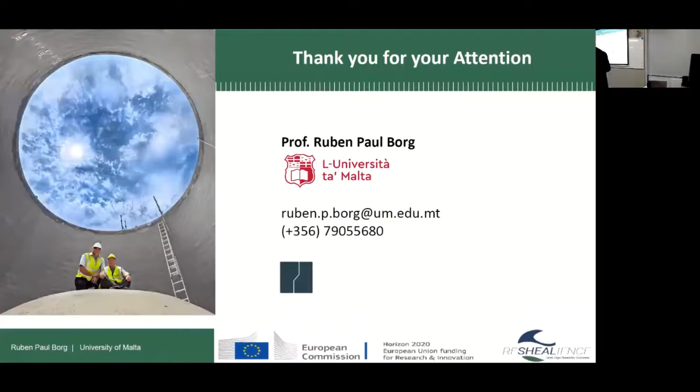So just compare what it was before, what it was just a couple of years ago, and what is now this structure. And some of us also went inside the tower, which was quite nice. So if you want information on this project, Ruben will be able to and happy to report.

So just trying to wrap up, we have these fantastic materials, I would say, to build new structures and retrofit them. And what do we have to do as engineers, as structural designers? Well, first of all, we have to design for now, for the time of construction.

With this material, surely we get a higher performance than if we design with ordinary concrete. This means that we can also optimize our structures and use less material to get the same performance. But then the benefit of this material comes from the fact that they have a higher durability. What does it mean? That the degradation of their performance is lower in time.

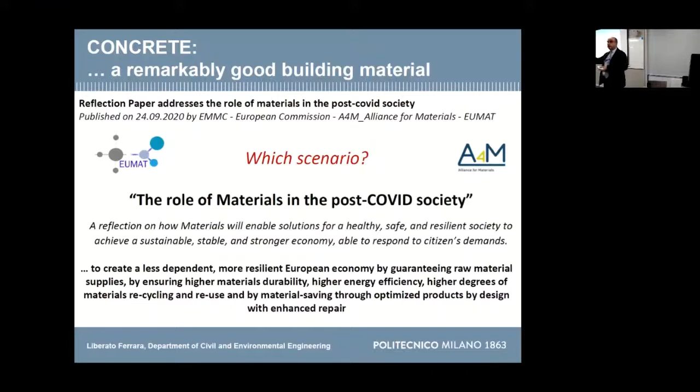This is one way to address the problem, not the only one. Service life, if you compute it with any available model, comes out very, very long, which is the purpose of these materials. This may mean that within the span of service life of interest to an owner, you may have very limited, quasi-zero maintenance, because your service life is surely much longer than that. You stay in this initiation stage because you are able to extend it much longer than for ordinary concrete.

Thank you so much. Okay, thank you.